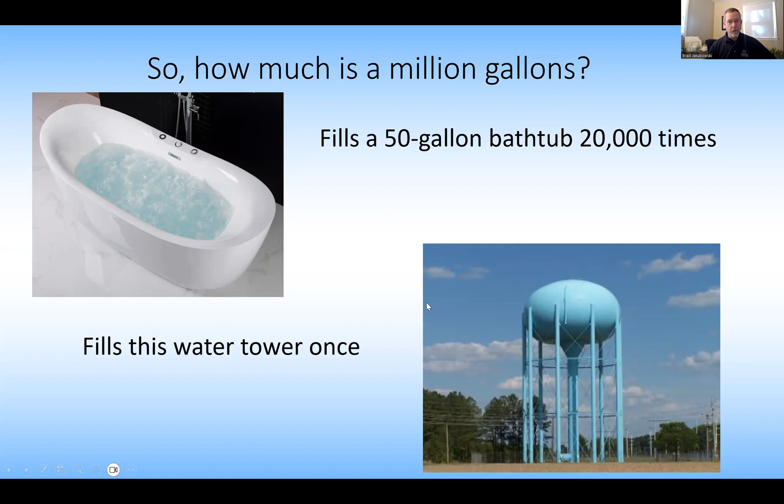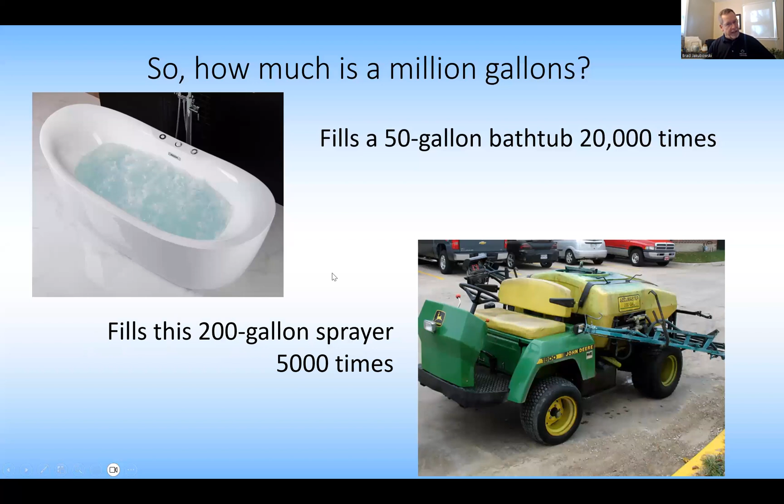So first question is, how much is a million gallons? Well, with 1 million gallons, we could fill a 50-gallon bathtub 20,000 times, or fill this water tower once, since they normally carry about 1 million gallons. If we're working in the city, many of us athletic field managers may be using municipal water, so this may be one of our primary water sources. We could also fill a 200-gallon sprayer 5,000 times with 1 million gallons. So if we had one of those water towers in our backyard over at the shop, we could have plenty of water to fill plenty of tanks over the course of a season, or even our lifetime. So that's how much a million gallons is.

Our challenge today is to figure out what we can do to conserve 1 million gallons or more throughout the course of one of our seasons. And this was kind of our challenge. I thought this was interesting, and it's been fun to work with this one. Is it even possible to save 1 million gallons?

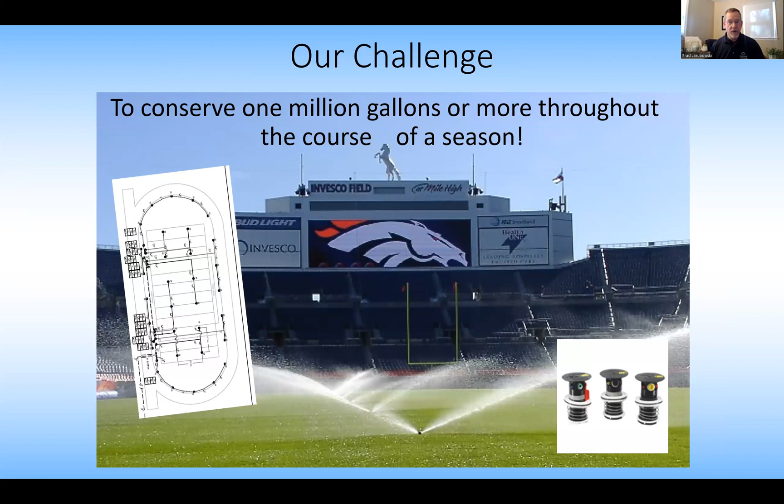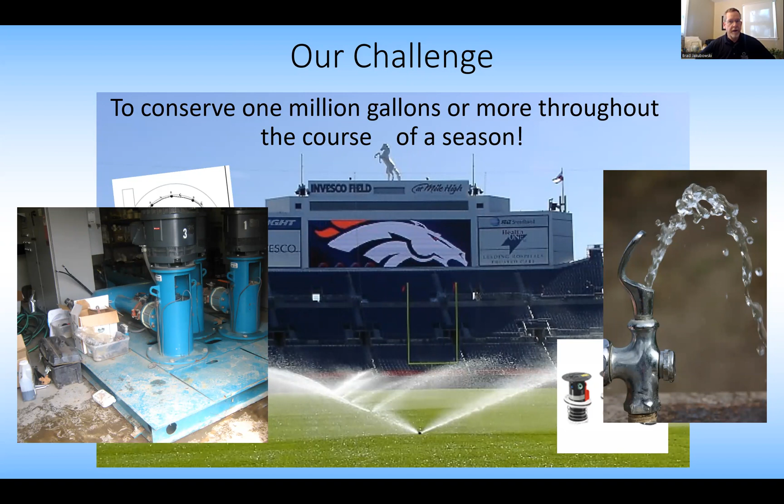Well, we can save it through sprinkler choices, the different kinds—maybe going from some less efficient sprinklers to more efficient ones might be one way to do that. Maybe it's some changes in design or improvements in the design of our systems. Capacity—maybe it's a pumping system versus a different kind of water source system we may be looking at. It could even be drinking fountains. If you have drinking fountains at your facility and you see them seeping or weeping and they don't seem to want to shut off, how much water is actually running through them over the course of a growing season or one of our game seasons? Or even what's going on in the bathrooms—do we have a leaky toilet or urinal that keeps wanting to run a little bit and doesn't want to shut off well? How do those impact us as far as overall water use? Those are some of the things we're going to take a look at today.

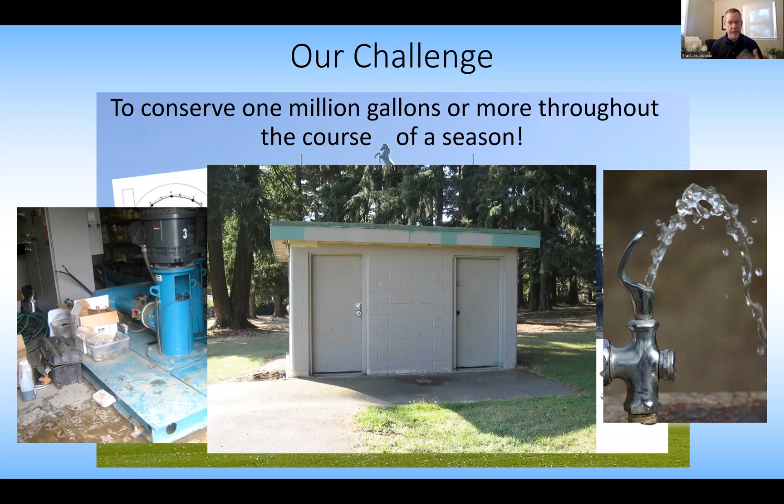So next question: why save 1 million gallons? Why would we want to do that? For you guys out there, does anybody have an idea of why we would want to save 1 million gallons? How does that benefit us as a turfgrass manager? Would anybody care to answer that one, or just give a suggestion of why?

Money, you bet. Money is a big one. So money is very important. Absolutely. Any others?

You think? And actually, money is number one on my list. So let's take the list that I've got here. Money, absolutely. Next one might be public relations, PR, maybe something else we can do with that.

I don't know, have any of you been approached by somebody where sometimes you drive by a bank and all of a sudden it's raining and you see the sprinklers running while they're driving by, or down a median and the sprinklers are still running. And so somebody may come up to you and ask, gosh, you're running those athletic fields, is it really necessary to use all those resources and water and things like that?

Oftentimes they'll approach me about that. Why are you in this particular business? So public relations can be another one. Stewardship, just being good stewards of the limited amount of water that we oftentimes may have. Or another one might even just be integrated pest management, or what I like to call integrated turf grass management. How do we manage our water to be able to better manage our playing field, the skinned area, diseases, weeds, all those kinds of different things. So there's a whole bunch of different reasons why we might want to save 1 million gallons.

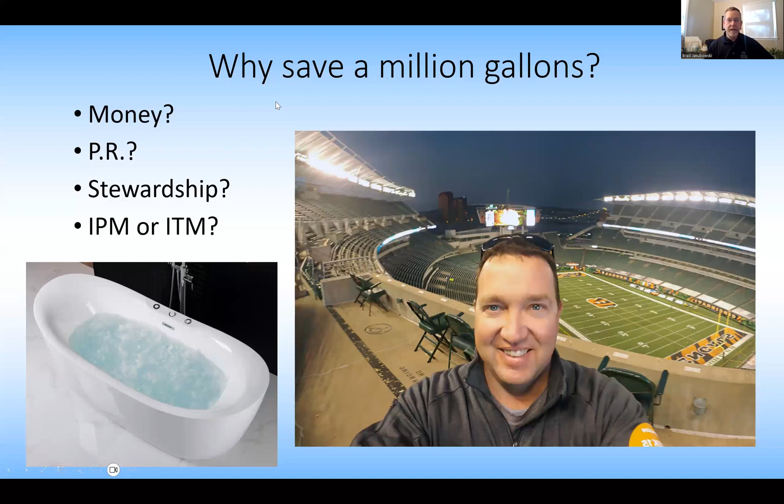I oftentimes give him a hard time because he went from a natural grass field to taking care of a synthetic field. And I said, it must be pretty easy to save 1 million gallons if you're doing it that way. But now that he's at the Bengals, he still has his practice facilities that he needs to do, and he's still kind of in that same frame of mind: what can I do to save 1 million gallons through a season?

Okay, so let's move on. Again, why save 1 million gallons? Well, one of the things we talked about was money. And the average cost these days, I don't know if you guys are running off of well or municipal water or whatever it might be.

Right now, average cost for municipal water is anywhere between $4 and $8 per 1,000 gallons. And this container over here on the right, this is a 1,000 gallon tank. So for each one of these 1,000 gallon tanks, it's going to cost us, let's say on average, about $6. Which if you think about it, that's actually a pretty decent deal, because if we go somewhere else, it might cost us $20 for a case of these, or $7 to $10 for a 5-gallon tank. So comparatively speaking, sometimes it can be better, but this is kind of what we're looking at.

So in this case here, let's go with $6 per 1,000 gallons. And we need to figure out, okay, how many 1,000 gallon units are there in 1 million? Well, there are 1,000 1,000-gallon units in 1 million gallons. And so if we were to take $6 times 1,000 of those units, we could actually save $6,000 in a growing season just by finding a way to save 1 million gallons.

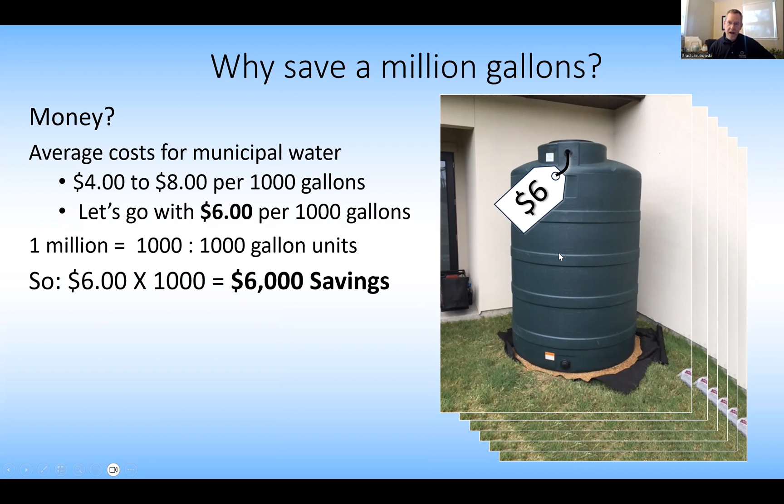And so those are some of the things that we would kind of try to look for. What are some of the little things that we can do? Can we save 10,000 here, 20,000 there, another here? All of a sudden, those gallons start to add up really, really quickly, which is kind of nice. Okay, and so again, all of a sudden, that $6 turns into multiple $6 as the season goes on.

All right, so again, why save 1 million gallons? We've got public relations. Is that one of the things that we might be looking at? Can we actually have something posted in the news or online or something like that?

We saved 1 million gallons. And all of a sudden, some of the people that might be a little bit concerned about water use and the things we're doing for athletic fields, golf courses, and parks - why are they wasting that water? Well, if we can save 1 million gallons, all of a sudden that might make a difference.

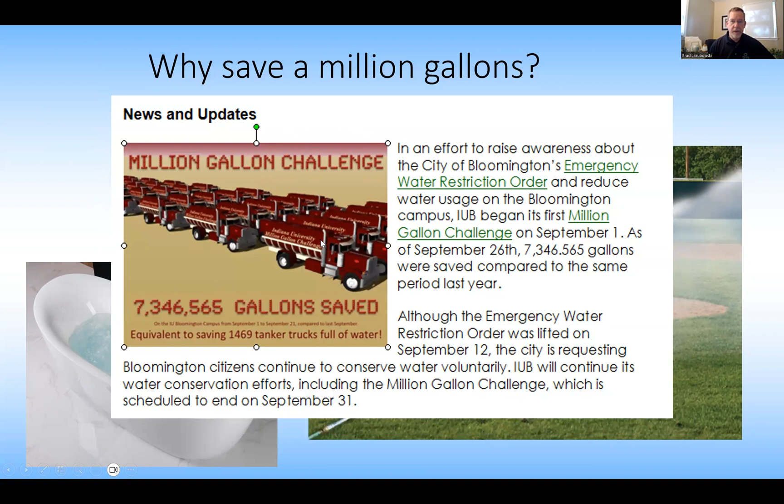It's kind of like some of those manufacturing plants that, when they do it, they'll say so many days without an accident or something like that. So it's also something you can kind of celebrate. It's like, what, we're up to 1.5 million or 2 million gallons. And people out there, they're going to say wow, that's pretty significant.

So again, stewardship - if we're limited on water and our resources, just being able to save 1 million gallons just might be helpful that way.

Or again, trying to limit diseases and/or weeds. Are we struggling with having too much poa triv in our outfield? Well, being able to cut back on irrigation a little bit, maybe that might stress it just a little bit so that we can replace it with perennial rye, Kentucky blue, tall fescue, or whatever we might be using. Or if we're down south, some kind of Bermuda grass or something like that. So there's some different things that we can do with saving 1 million gallons.

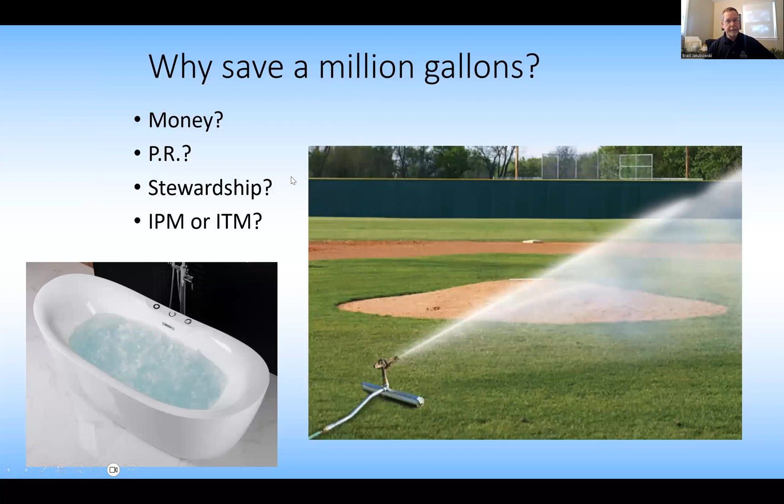Okay, or out there at Petco Park in San Diego, this is one of the things they would also let people know as far as PR goes: to conserve water, the playing field is watered on a timing system with moisture monitors that will adjust watering as needed. That's a great way to let them know that we're not just dumping a whole bunch of water and fertilizer and all kinds of things to get these things to look so good. It really helps show them that we're pretty darn good at what we do, and this is one way to show them that on limited resources - which we all have - we can actually make a pretty darn good looking field with minimal resources and materials.

So again, why save 1 million gallons? Water efficiency is important - this is good to remember. It's important no matter the reason we do it, or the source, or the method of use of how we do it. All of these things become very, very important. It's, in a sense, very critical that if we can do this, it makes a difference.

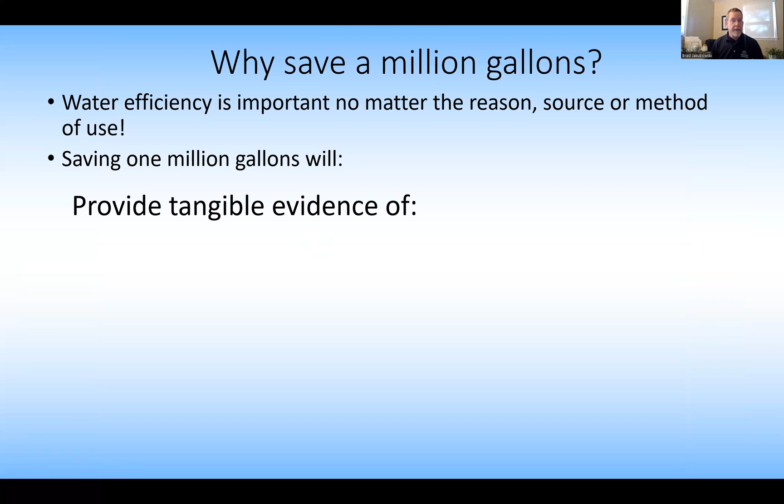So they provide, by saving 1 million gallons, tangible evidence of documenting that your facility is a wise water user. So all of a sudden, record keeping, monitoring your meter or whatever it is, how much daily flow you're using, can be very, very critical in this case. So then just documenting that your facility is a wise water user helps you defend yourself whenever those questions might come up.

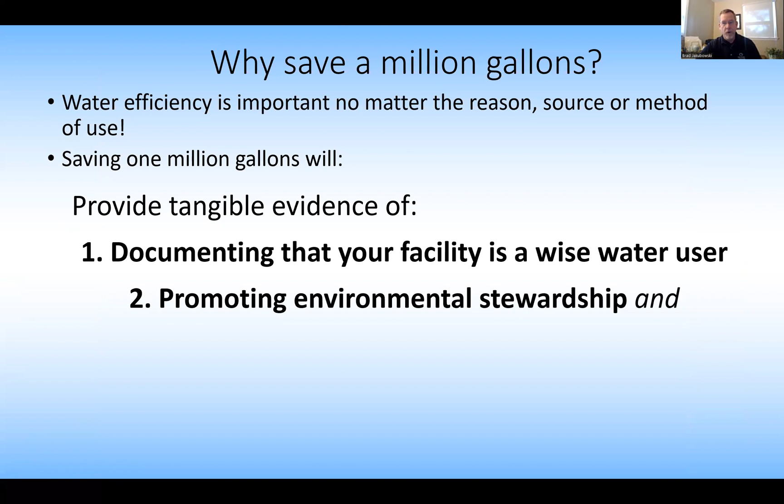Another one then is just promoting environmental stewardship. And there may actually be different grants or different prizes or things that you can apply for that may help with this in this kind of situation.

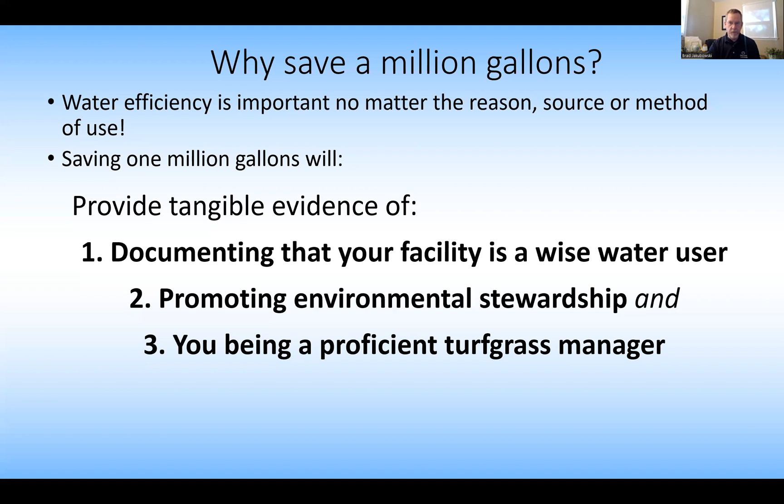Another one then, finally - this one here I like the best - is it also provides tangible evidence of you being a proficient turf grass manager. And in this industry, we have to be. For us to keep our job, or just to keep the business running, we have to be as proficient as possible. And if we can do this, just by recognizing the little things, it can make a huge difference.

Okay, so how do we save 1 million gallons?

Well, one of the things that would be very important is first identifying overall water usage of an entire facility over the course of a year, which might come from final overall water bills, yearly water bills, and just good record keeping.

From there, implementing various outdoor and indoor water saving practices. It's not just what we put down on the field or on the skins, it's a matter of indoor and outdoor. If we can record anything we see dealing with water, we can do it. Does it really matter how you save it? Not really. Record keeping becomes key when we're doing this.

I was speaking with John Scott, vice president of agronomic services with Nicholas, and this is some of what he tries to keep in mind when doing designs: water saving starts in the mind, and you have to be committed to it. Once you start doing it, it becomes pretty straightforward.

So let's start saving 1 million gallons. How can we do this? One of the biggest things is just improving our irrigation scheduling.

This is something you can ask yourselves. We put out some notes and found out from other people how they schedule their irrigation. What we found is that 97% of them use some kind of observation of the turf, like asking are we starting to wilt, do we have footprints going across there, do we see some stress areas. So most of us use observations of the turf.

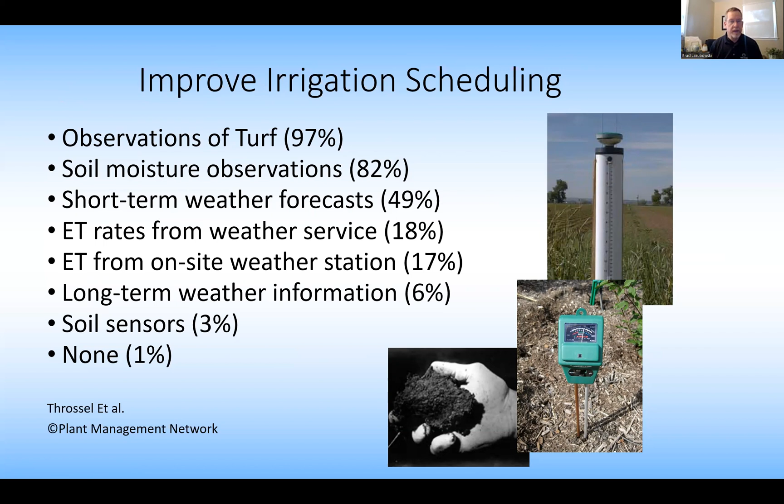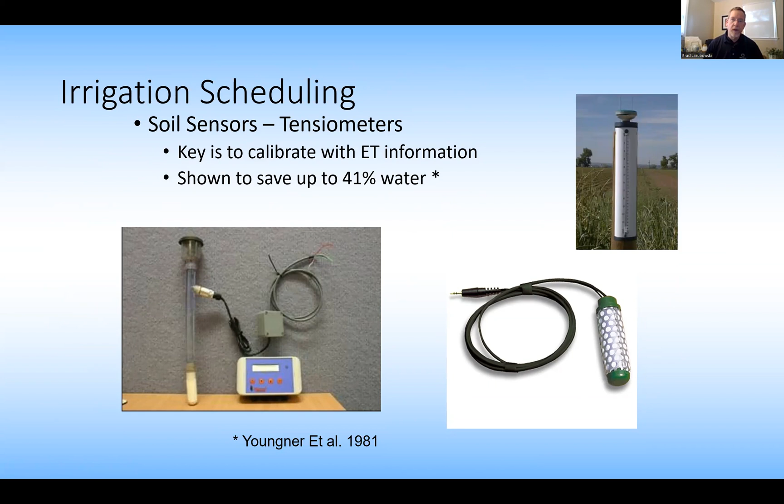Soil sensors, some of you might use soil or moisture sensors, maybe in-ground ones like this, or atmometers. These atmometers give you good ET information by simulating what evaporates off the soil in addition to what evaporates into the atmosphere, helping you find out what's going on with soil and air dynamics.

Have any of you used a TDR or these probes to monitor soil moisture in the soils throughout the week? Golf course superintendents often use these on their greens, and when the greens get down to, say, 13% water moisture per volume, that's when they need to start irrigating. We can do the same on our baseball fields: find out when the stress time is, when we really start to see footprints out in right field or left field, when things really start to wilt.

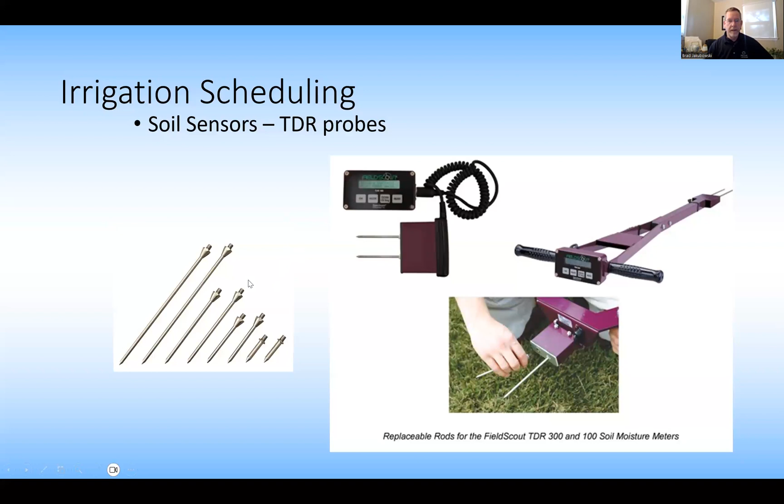You can take moisture sensors out there and take samplings and find that these things start to stress at 18% or 12% or whatever it is. That can be a nice cue to push our grasses a little bit and save water by using one of these TDR probes. Soil sensors are becoming much more readily available, and there's a whole bunch of different kinds, as you can see here, some you can punch into the ground or bury, or old-fashioned ones like this.

I pulled this one off the internet recently. Installing a WaterSense labeled soil moisture sensor could save an average home with an automatic irrigation system more than 15,000 gallons of water every year.

So I got to thinking about this. It's like, okay, 15,000 gallons - what would it take to actually save that much? Let's say if we had 80 irrigation days throughout the summer, that would equate to about 180 gallons of water per day. Not bad, that's pretty easy to get. Or that would be about a 70 or 80-second reduction in runtime for a 10-station irrigation system.

So if you had 10 stations all running, and all you did was cut back, let's say 2 minutes, or actually less than 2 minutes per run for each of those stations throughout the season, you could very easily save 15,000 gallons, which I thought was kind of interesting.

So oftentimes it may not take much, it might just be a matter of taking a small change and seeing what happens, or even pushing your turf a bit. You know, I usually have my sprinklers at night, running at about 15 to 18 minutes. Well, what happens if I cut back 10%, or a couple of minutes? What difference will that make in our fields? Are there some differences in certain zones? Can we run some of these zones at different times as well? It can make a difference.

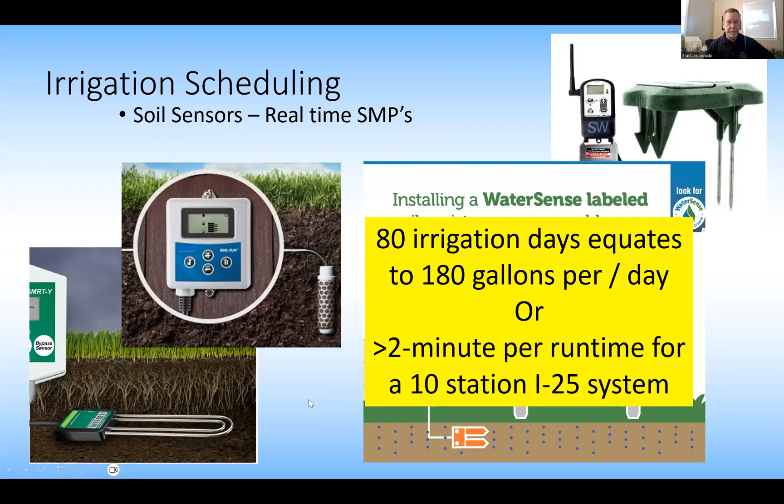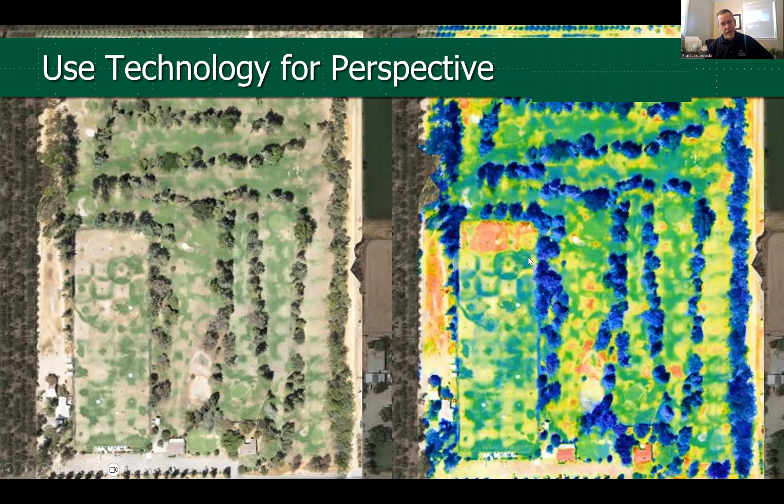Technology - have any of you had a chance to use drone technology monitoring soil moisture, temperature, or leaf color? Oftentimes we can get stressy situations like this where you can see the infrared signatures, where you can see where these sprinklers just weren't doing very well. Or on a baseball field, you may just take a photo and find out something like this.

So from your experiences, if you saw something like this with a bunch of crop circles out there, what does this tell us about our irrigation system? Has any of you ever experienced this - how does this impact us?

With this one, when you start seeing donuts like this, or a bunch of crop circles, this is normally an indicator that you have low water pressure. So then it's a matter of finding out - do I have leaks? Are 2 stations running at the same time? Is one not shutting off? All of those kinds of things. There's a number of different things you can start to monitor. They've definitely got some serious crop circles going on here, maybe some heads that aren't working at all, while these other areas are just a little bit more on lower pressure or something like that.

So this would be something else to utilize - simple drone technology, or just standard photographs. Another one here would be monitoring short-term weather information.

So I've got a question for you. We've got these two here: on Monday, June 11th, today's high is going to be 96 degrees with 15-mile-an-hour winds out of the south. Or on Friday, June 15th, today's high is going to be 93 with 6-mile-an-hour winds out of the southwest. So then, off the top, I would normally ask attendees - which day would have a greater need for irrigation? And just by this limited information, you'd probably think, well, Monday definitely going to have a greater need for irrigation.

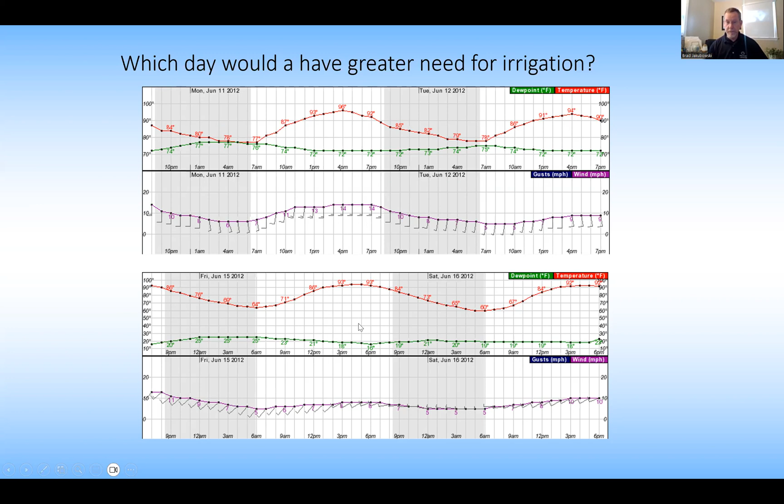So this one doesn't really need irrigation. This one probably definitely would, or definitely needs some serious monitoring if we have a day like this. Okay, all right, another one.

I don't know if any of you have actually conducted an irrigation audit or gone through one of these. Oftentimes, most people think, when we're looking at this, of putting out the catch cans and seeing how well the water is being distributed. That is one way, one part of an irrigation audit. That's one of the things we would normally do, just to see how well our irrigation sprinklers are doing.

And so with this, an irrigation audit does measure distribution uniformity, but it also does a lot more. The question then is, when you're running an audit like this, how long do you have to run your system to adequately irrigate the driest 25%?

That's what you're always trying to do: finding the driest areas in your fields and keeping those alive. By doing that, that means a lot of the other parts of your fields may actually get too much water. So this is where you try to make sure that your sprinkler systems and irrigation systems are running at peak performance or peak efficiency.

It's important to make sure there's not a big difference between the dry areas and the wet areas. That's kind of what this comes down to: you want to try not to have really, really dry areas and really wet areas. You want to try to bring those into the middle.

So from there, excellent is 80%. If you have an 80% efficient system, that's an amazing system, very, very good. We start getting down to 55%, that's the one that really, really struggles. Normally athletic fields average between 60 and 70%, so we're kind of in between, around the good area here.

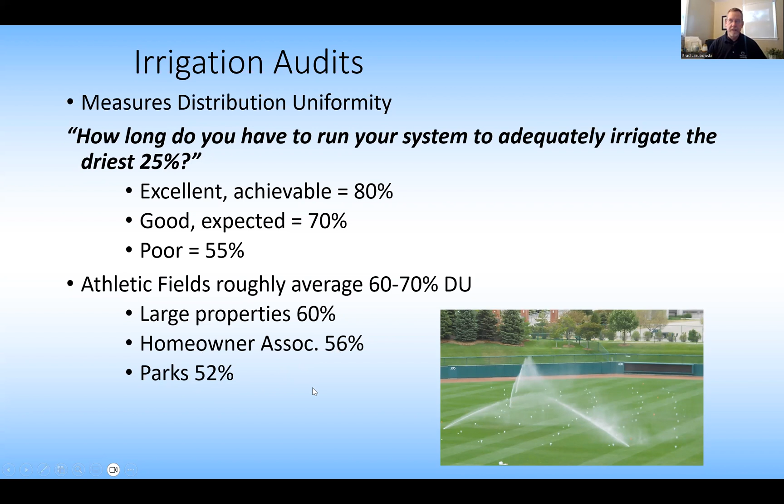Large properties might be at 60%, possibly. Homeowners associations, maybe around in the 50s. And parks also kind of around the 50s as well, just because of the nature of how they're installed and the kind of systems that they have.

So just as an idea of how one of these things run, if you wanted to find out what your distribution uniformity is, it's just a matter of taking the low quarter divided by the overall average of everything else, and finding out, well, our overall average for this particular system is 50%. It runs at about 50% efficiency.

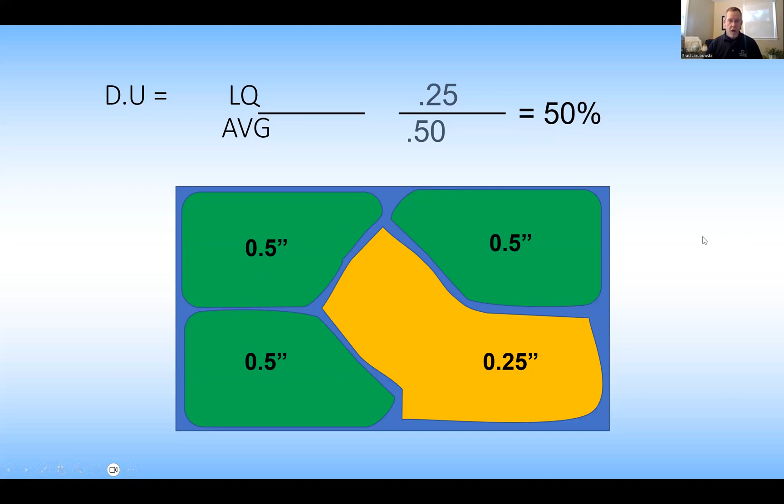So from here you would then say, okay, what does that mean for me? Let's say these places are receiving a half an inch, where this one's only receiving a quarter of an inch, which makes a huge difference. So what does that 50% mean to us? We ran our numbers and wanted to find out what's happening once we did all our catch cans.

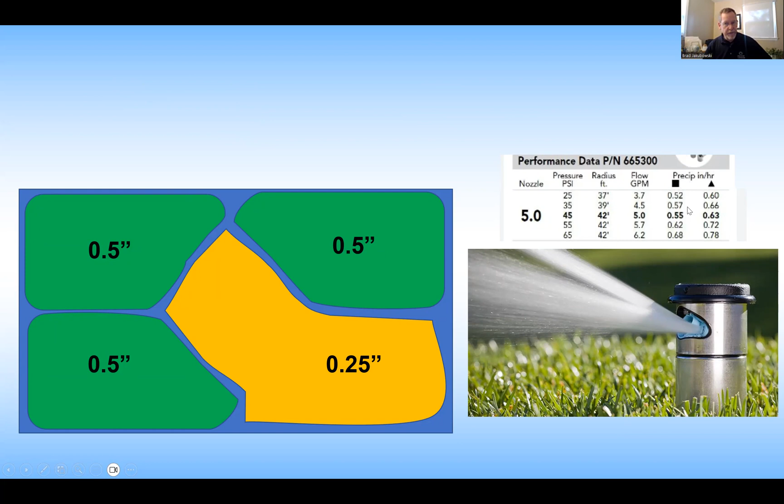Let's say with this, we're using I-25s, or these particular sprinklers, and with these nozzles, they're putting out about 5 gallons a minute. And we're going to say they put out about a half an inch of water per hour. Instead of 0.55, we're going to simplify it and just say they put out a half an inch of water per hour.

If the grass required a half inch of water and the system was running perfectly, with a precip rate of a half inch per hour at 100% efficiency, we would only need to run the sprinklers for 1 hour. That's what this is showing us: if we ran these sprinklers for an hour, we'd get about a half inch of water from them.

However, if our system only has a 50% distribution uniformity, that means we'd have to run our sprinklers for 2 hours. Here's how you figure that out: a perfect system would need an hour, but because we're only 50% efficient, you take 1 hour divided by 50%, and it comes out to 2 hours.

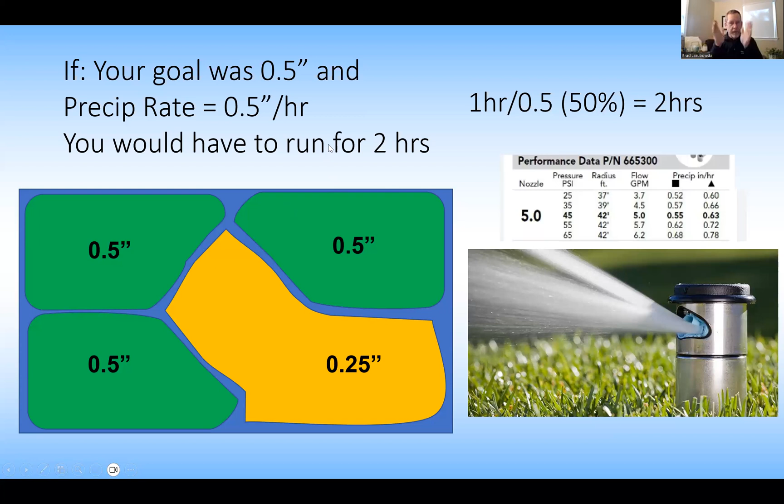So to make sure this part gets enough water to survive, we end up overwatering other areas twice, where one spot finally gets what it needs at a minimum. That's why it's important to have the highs and lows as close together as possible.

So what does that mean for us? If we're running these sprinklers at 5 gallons a minute and have to run them for 2 hours or 120 minutes, that's 600 gallons times 40 sprinklers, which means we're looking at 24,000 gallons per irrigation event. Every time you run those sprinklers on a particular field, it takes 24,000 gallons.

We could start doing the math that way too. So keep in mind, we're looking at 24,000 gallons to keep all of this grass alive. This area is going to be a little more wet, and this one is going to be just sufficient.

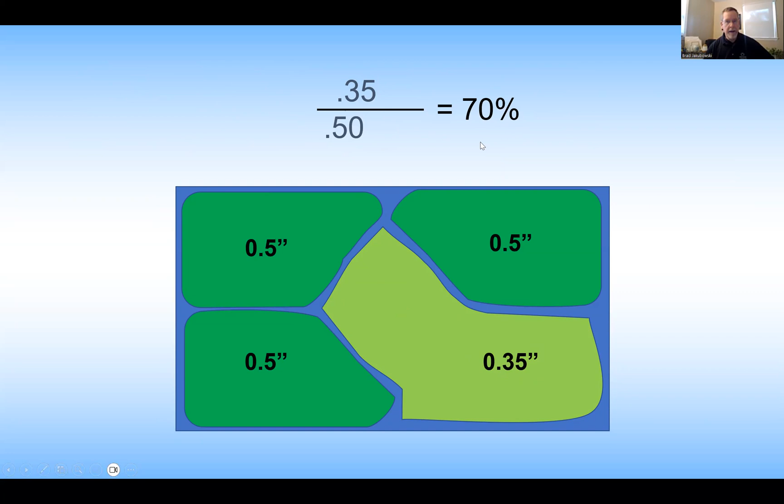Let's say we were able to improve the efficiency of this area. Instead of a quarter inch, we bump it up to 0.35 inches, or a third of an inch. That increases our overall efficiency from 50% to 70%. So what does that mean for us? Let's run the numbers.

If our goal was a half inch and our precip was 0.5 inches, we'd take that 1 hour divided by 0.7, and instead of having to run those sprinklers for 2 hours, we'd only have to run them for 1 hour and 25 minutes.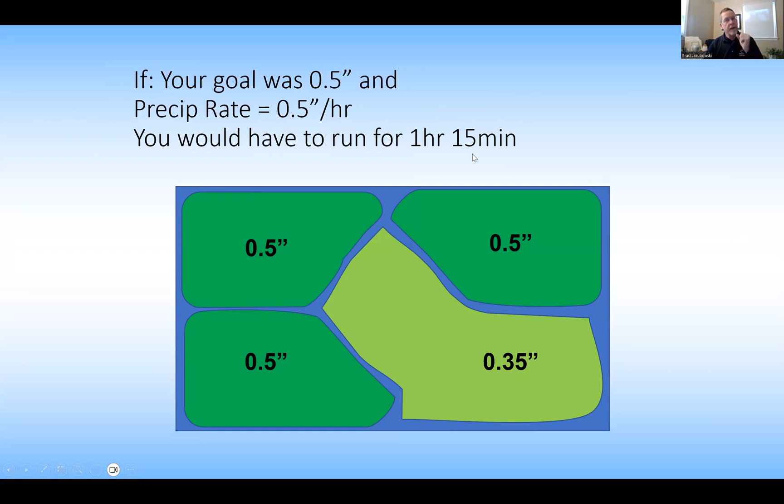It becomes that much more efficient just by fixing the sprinklers and finding out what our problem was. So instead of a 2 hour runtime, now we're only at an hour and a quarter, which makes a huge difference.

By running it for just those 75 minutes or so, instead of running 24,000 gallons per irrigation event, we're now only running 17,000 gallons per irrigation event, which means we have a savings of 7,000 gallons every time we run our sprinklers for this particular area.

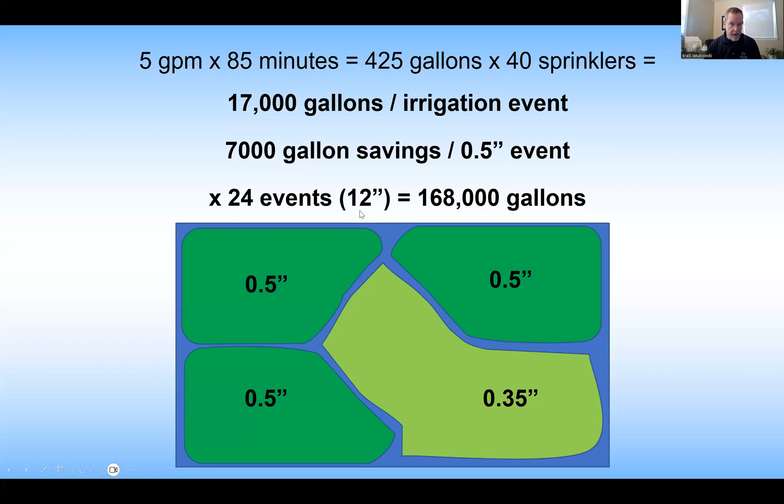If we had 24 irrigation events, or put down 12 inches for the year, we would save 168,000 gallons. That's a lot of math, but there are things that, just by changing how efficient your sprinklers are, can make a huge water savings in a relatively easy situation. I just want to show you that by changing our irrigation efficiency from 50% to 70%, we can have a pretty good water savings event.

So it's about 14,000 gallons per inch that we're saving. If we needed more than 12 inches throughout the growing season, say 18 inches, we could say we need another 6 inches, which would be 6 times 14,000 gallons.

That's how much we would save throughout the season, kind of thing like that.

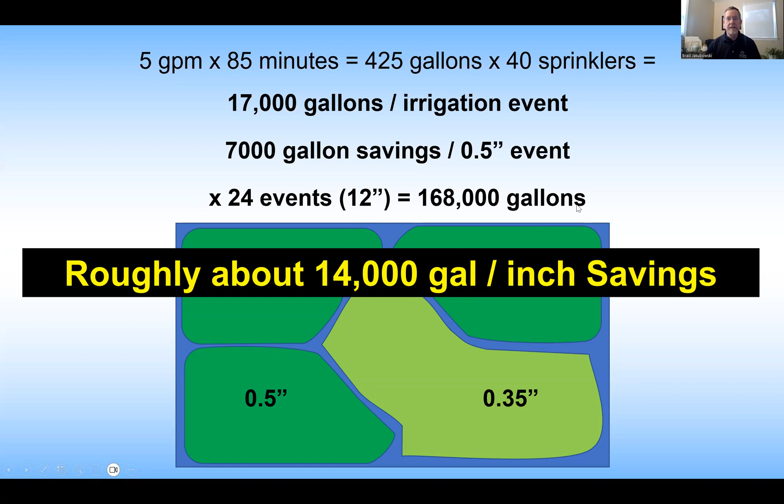Okay, so you can use different kinds of things when you're doing an irrigation audit. You can use official catch cans like these that have got little gradations in them so you can read the volumes, or you can use tuna cans. This is a tuna can right here.

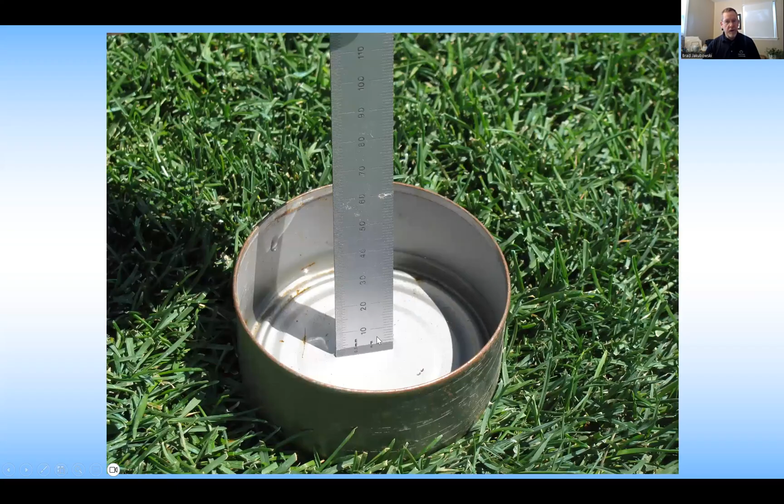The nice thing about using tuna cans is they have these perpendicular lines where all of the edges are straight up and down. When you have a can that looks like this, you can put a ruler directly in there and measure how much water. I ran the sprinklers for 20 minutes - how much water did I get? You can stick a ruler in there and find out, when I run the sprinklers for 20 minutes, I get 1/8 of an inch or whatever it is.

So whenever you're using cans that are perpendicular, they don't have slanted edges like this one. You can take a direct measurement with a ruler, and it makes it really easy to get an estimate of how much water is going down at a given period of time.

Okay, so again, other things irrigation audits will help with is finding out what's happening with my water supply. Maybe you're able to do some investigations and find out, you know what, we've got some steel pipe out there and it's starting to corrode, and instead of being a 6-inch pipe, right now it's down to a 2 or 3-inch pipe. It can make a huge difference.

So you're going to check that. You'll check your pumping system or your piping systems and fittings - how's everything doing, are the valves working okay? Okay, sprinklers, the control system.

Do the sprinklers out in the field really match up with the kind of sprinklers that are supposed to be on, based on how the controller is set? With the particular sprinklers you have out there right now, let's say it's been set for the last 2 years, running at 20 minutes a station. In that 2 years, let's say you went from brand A sprinklers to brand B sprinklers, and all of a sudden that means you have a totally different application rate, and you might need to reevaluate how long you run those sprinklers - maybe cut it from 20 minutes to 15 minutes or something like that.

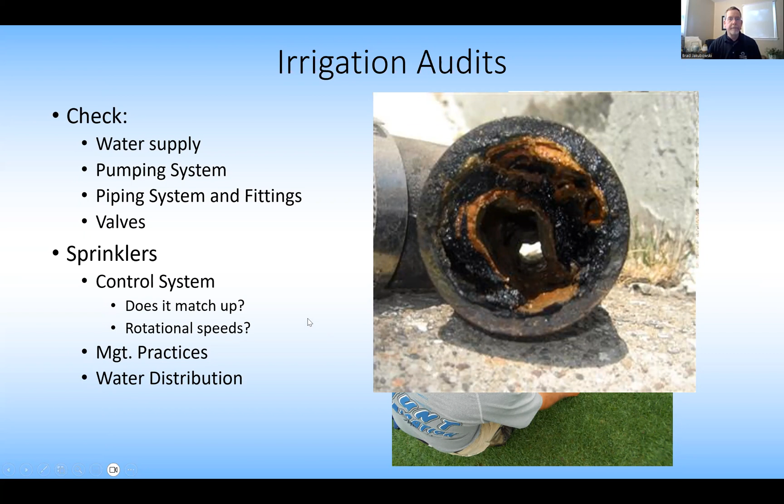You can also evaluate your management practices and water distribution just by sticking a screwdriver out in the field after an irrigation event and seeing the differences in how it feels and how that screwdriver goes in there. It can be something else as well, so you can do that.

Also, with a pitot tube - this is what we call a pitot tube - you've got this little tube, you put it right into the stream of where the spray is coming out, and it'll give you a dynamic pressure rating, just a readout of what your active pressure is. These can be very helpful to find out if my sprinklers are really applying water at the given speed they were supposed to be.

Okay, so that's one of the things you can do, running these on different heads. It was actually very helpful when we were running an audit on a particular system. This is what a pitot tube looks like.

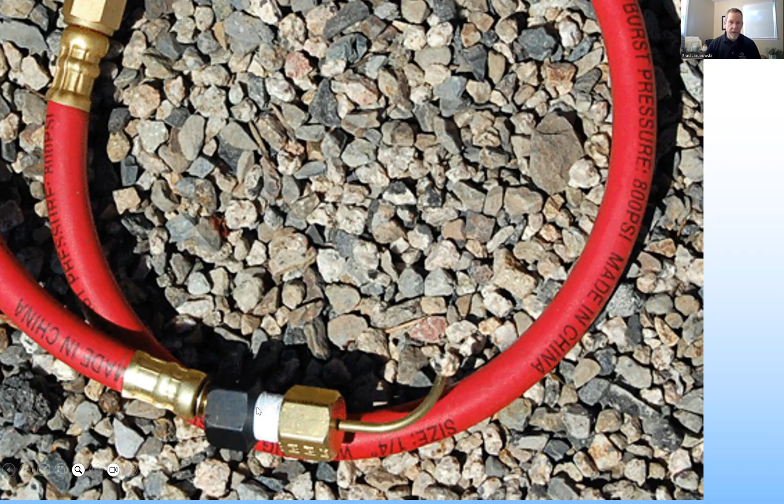So you've got your pressure gauge here, and then you put this little piece right there. It goes directly in the stream of the water, and then you can find out what's happening with dynamic pressure of each sprinkler. Also, if you've got something dug up, you can put a pressure gauge on the riser or off of the swing joint, and test your sprinklers that way too.

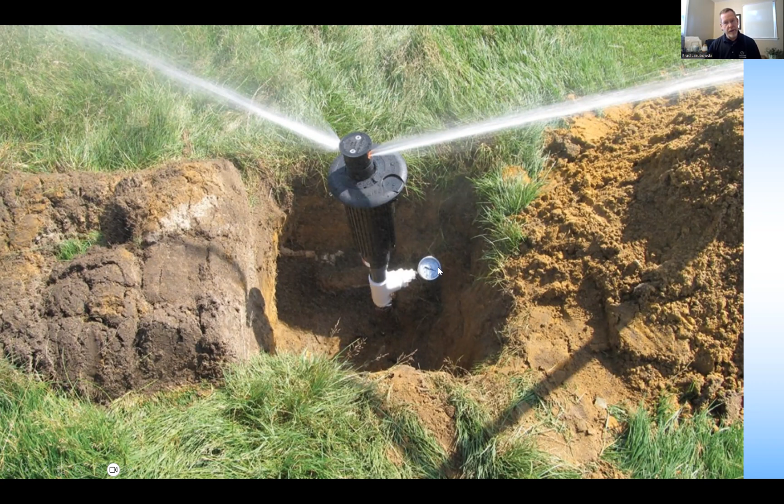So what happened one time is I was out there doing an irrigation audit in this particular field, on the same zone, actually the same lateral. One of the heads tested out at 70 psi. This one tested out at 46 psi.

So I went to the turf manager and said, why is there such a difference here? Have you been doing anything with these? He said, well, actually I did. This sprinkler over here just didn't look right, so I put a bigger nozzle in it, and it made it look better than this one. What it did is it completely changed the dynamics of how this thing was applying water out there. So all of a sudden this one was rated at 70 psi, this one was down to 46 psi, and he was really struggling, having to water these areas a lot more than over on this other side.

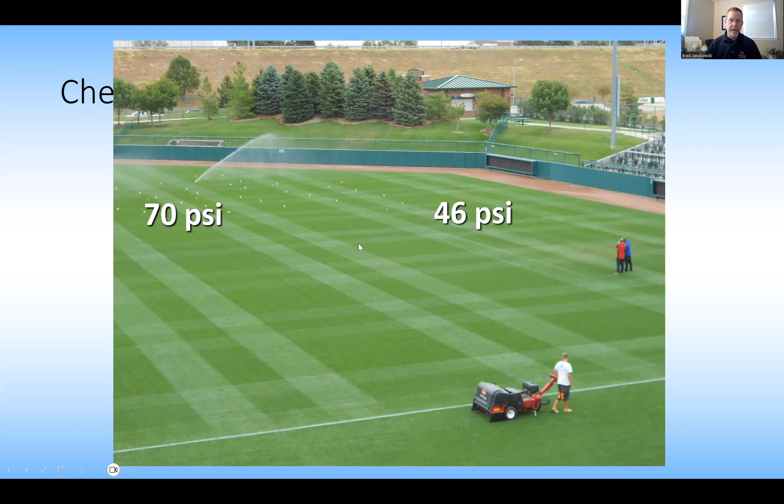So we had to do some investigating to find out what we could do to make that a little bit better. This can be very helpful to find out where your inefficiencies are. Do you have problems with piping or nozzles or clogged sprinklers or whatever it might be? Using a pitot tube and doing dynamic pressure checks is one way to find that out.

So this is kind of what we looked at when we actually tested those. This was that 70 psi sprinkler, and in a given period of time it put out about 10 mils of water, where the 46 psi only put out about 4 mils of water. So there was a pretty significant difference in how much water this sprinkler was putting out compared to that one, and those things can really make a difference.

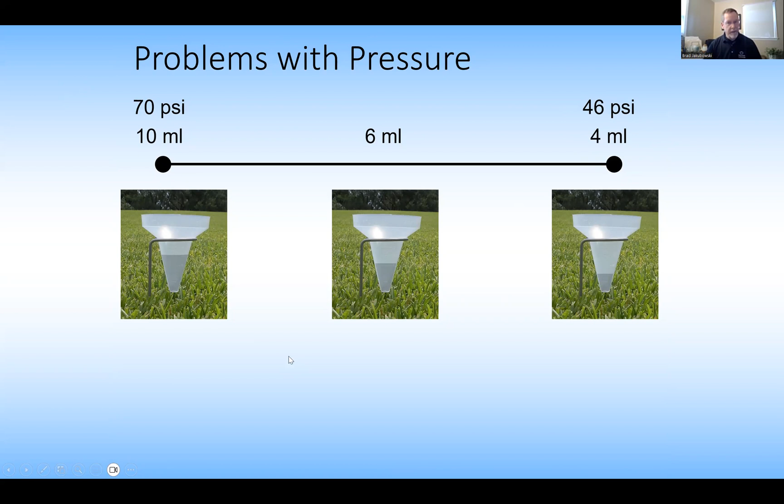So if this is our goal and we're putting this out, you can see that you'd definitely need to run this sprinkler longer to reach that 1-inch goal. This one, let's say you only have to run for 20 minutes. This one, you're probably going to have to run 40 minutes, close to an hour, just to get to that 1-inch goal. Huge difference.

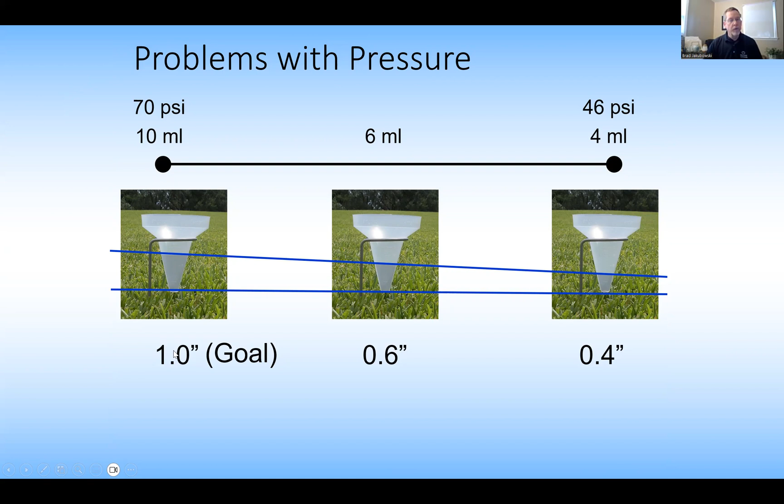Visual inspection can be another thing to keep an eye on. Do I have standing water? And when you're checking this out, does the water stink? Does that area stink? Has it been doing this for a long time, or is it fairly recent? Does it have a rotten egg smell, or does it not? That would be another thing to check.

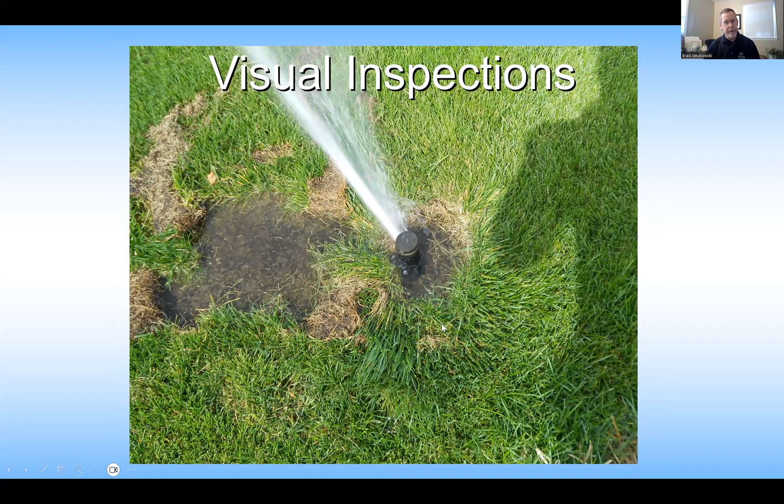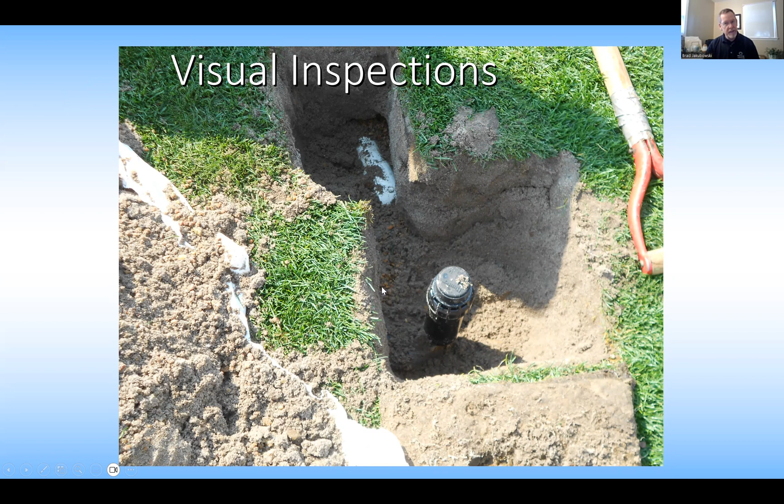If you're digging up and doing sprinkler repairs, monitor and take a look at what the soil's doing, what your roots are looking like. Anytime you do this digging, take a look at the roots and see how things are going. Do you have black layer? This is at one of the baseball fields we had. It had a pretty significant black layer, and it also smelled a little bit on the rotten egg side. So we had rotten egg smell going on and a black layer.

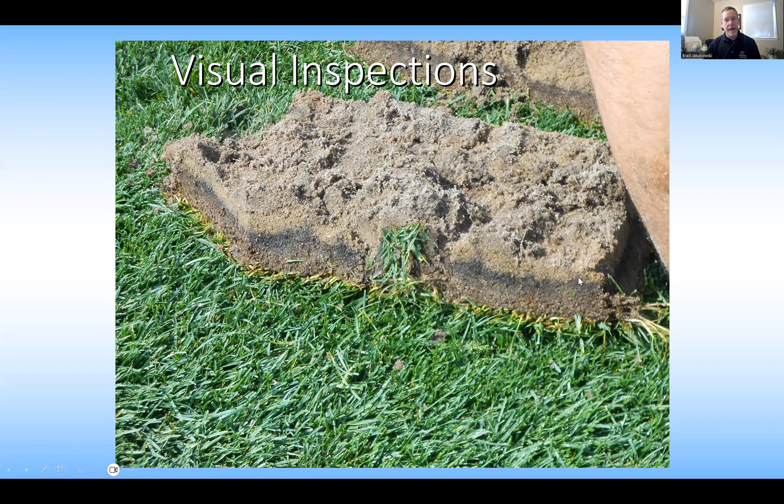In addition to just watering differently, chances are you're going to need to recommend a pretty serious aerification to break through this and help those roots become more efficient in receiving that water. So, recommendations from the industry: really learn to work with what you have, survey your facility for wet and dry spots, try to find different things.

This is one of the things I thought was really interesting: mark them on a glass-covered as-built in the crew room with a grease pencil. So we started doing this. It was really kind of interesting.

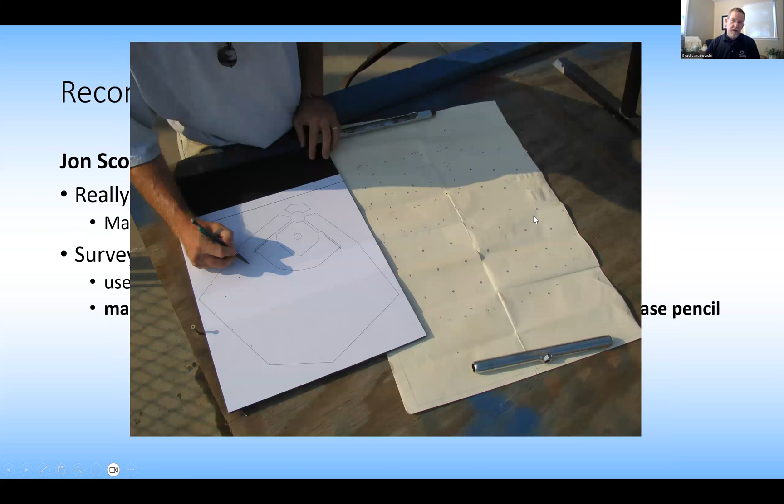What you can do then is use an as-built or your own map and build from that. As you're doing that, if you see donuts or crop circles, or something like that going on, well maybe there's something I can do, or at least mark it down so you don't forget about it, because it's more than just perception. When this is happening, it's perceived as losing water, but you also are actually losing water.

So this can be very, very important, because all of a sudden you've got water running everywhere. You can almost find out how much water you're losing each irrigation event.

Another thing we're going to take a look at here is what are some of the different types of irrigation system improvements I can make to save water, but not necessarily spend a lot of money. This was a survey that was put out.

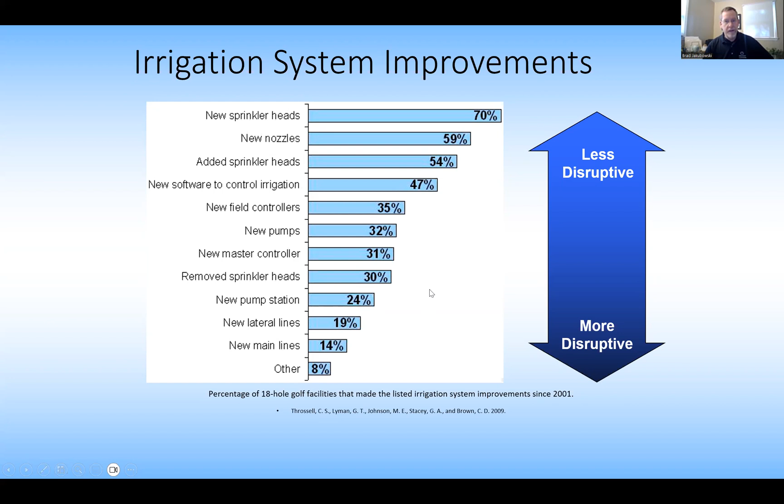Also, drain check valves might be something else you might want to take a look at. You'll have to find out, do your sprinklers have check valves in them? Oftentimes it's just a little rubber disc that's located here on your sprinkler heads.

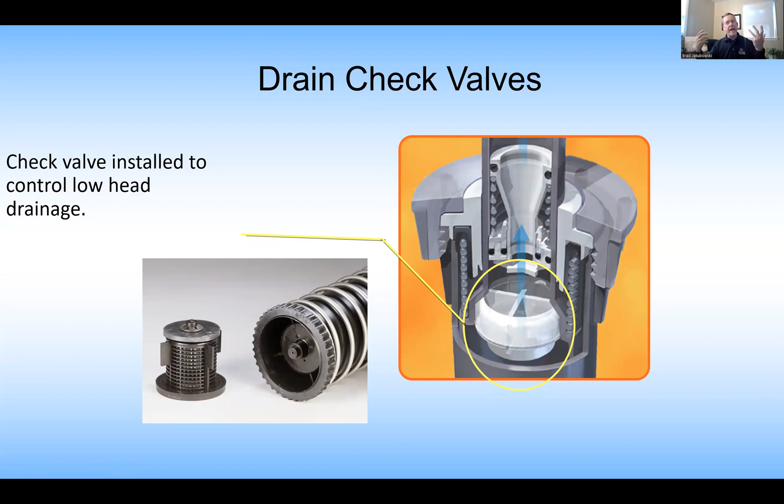What this does - these check valves - instead of the water running out of the top of the head, let's say if you've got a pretty good slope on your fields, some of that water is going to naturally just drain out of the heads. These check valves keep the water in the lines and don't let the water run back out, so you don't have to refill the pipes, so to speak.

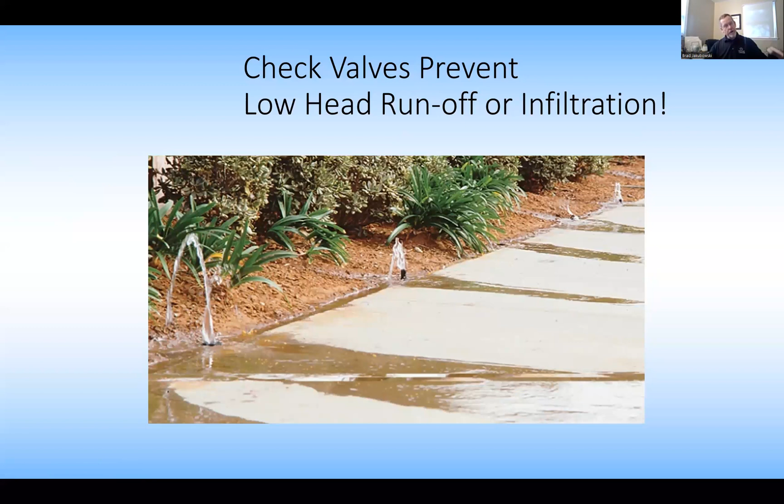So what difference does this make? If you've got some low areas, if you've got a pretty good crown on your fields, you may not see the water popping out and running like this, but without check valves, and you've got a crown on your field, that water's going to empty itself out of these pipes.

For this baseball field, let's say we have 2,000 feet of 1.5-inch pipe, and 50% of that water drains out when the system shuts off because there's no check valves, and it just naturally seeps out of those sprinkler heads. So we're looking at about 5 gallons per 100 feet of pipe, or 100 gallons drains out per every irrigation cycle.

If you have 128 irrigation days per year, that's about 12,000 to 13,000 gallons you could probably save just by adding these little rubber discs on the bottoms of your sprinklers - very, very simple. If you had 270 irrigation days, watering almost every day because you're in some of those warmer areas, you could double that, up to 27,000 gallons saved. You can see how much that would be - about $77 or $167 worth of that $6 water.

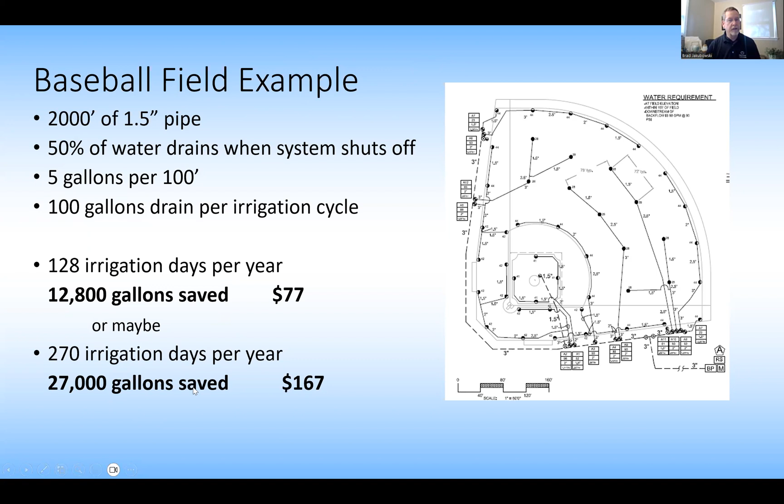Okay, so that'd be something else to kind of look at. I put this one in here. This is a golf course back in Nebraska that I'd worked with.

The reason I put this one in here is because he was irrigating his greens using a block system, very similarly to what we use out on our baseball fields and athletic fields. With this one, he had a 9-hole course, and he was putting new heads around all of the greens because they were giving him some problems. He was having trouble with irrigation, dry spots, water costs, and pumping costs.

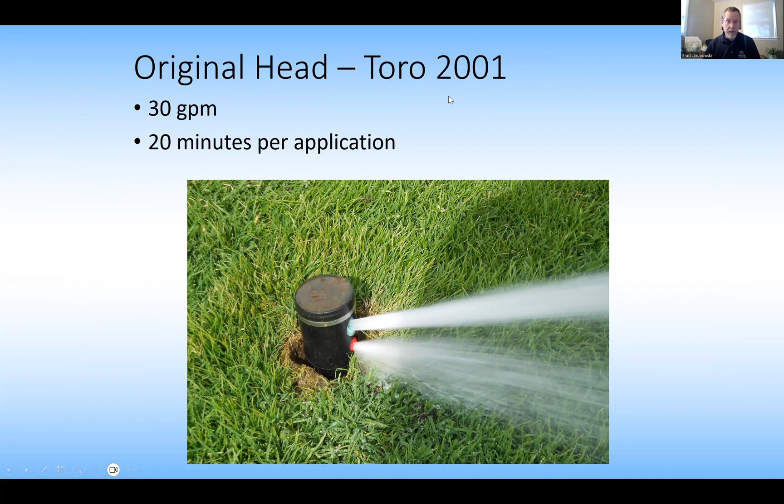He went from these old original Toro 2001s, which were pretty old heads, and swapped them out with these Toro DT34s, where you can kind of see they're very similar to a Hunter I-40 Ultra, with the opposable nozzles. By swapping out the sprinklers around the greens, he was able to reduce his run time from 20 minutes per application down to 14 minutes per application.

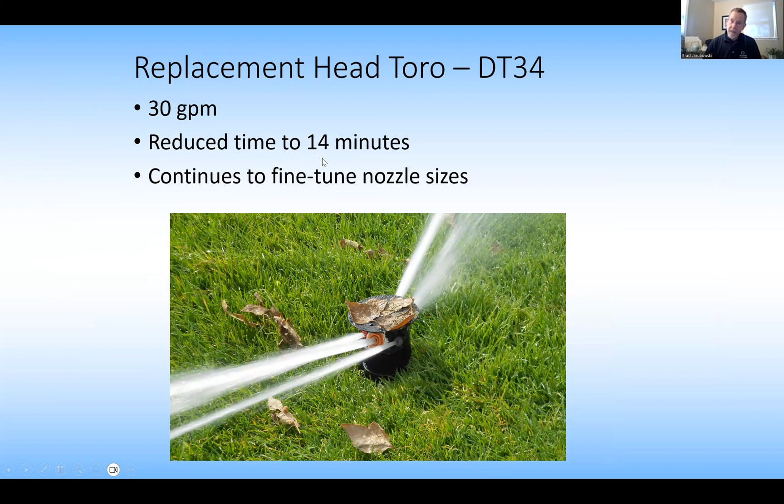Now he's continued to go in there and fine tune the different nozzles to help improve things further. In this situation, he was able to drop his run times significantly, improving his irrigation efficiency, and now he's much happier with these sprinklers.

He had some dry areas that he's been working on to get these things better. For him, in this particular situation, by just improving sprinklers, he was able to, for 10 greens, which is about 2 acres, similar to a football field, save about 3 million gallons in a growing season, which made a huge difference for him.

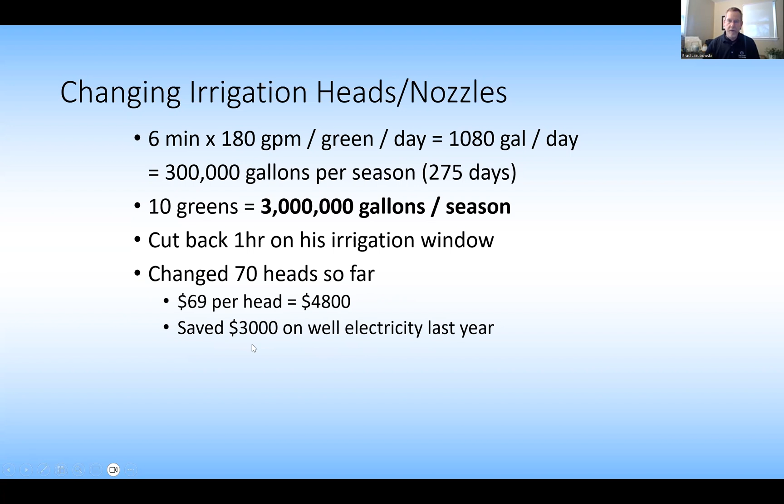Changing the heads cost him about $70 per head, running him about $4,800. But he was also able to save $3,000 on well electricity in that one year. So he almost recouped the cost of the sprinkler heads just by the amount of water he saved on running his well.

Another thing he does, something you might want to consider, is that he mows first in the day. Then after that, he does a quick syringe cycle with the sprinklers to seal off the grass and give it a chance to cool.

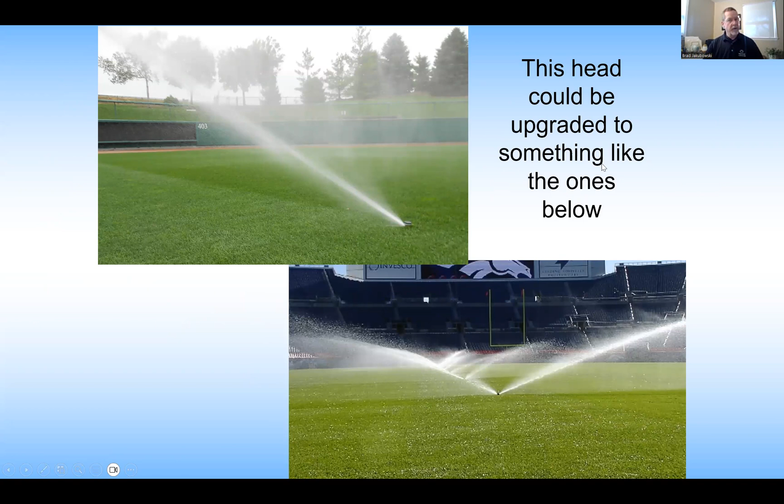Okay, pressure regulators. I don't know if in some of your sprinklers, especially in the landscape areas, you may want to consider whether you're using non-pressure regulated heads, like some of the less expensive ones from Depot or Lowe's, or actually ordering the better heads out there that are pressure regulated.

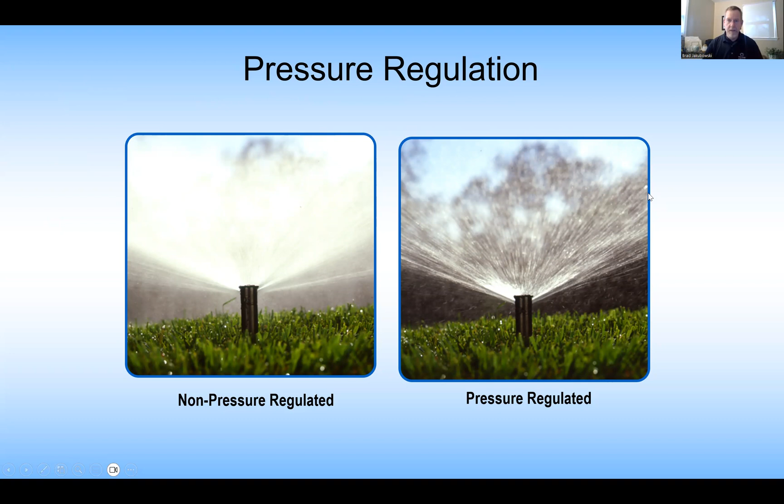Pressure regulated heads keep that pressure the same, let's say 40 PSI, so your droplet size is going to be very consistent. If our water source is at 70 or 80 PSI, non-pressure regulated heads are going to give you more fogging and less efficient irrigation applications. If you can have larger droplets instead, you're going to save water.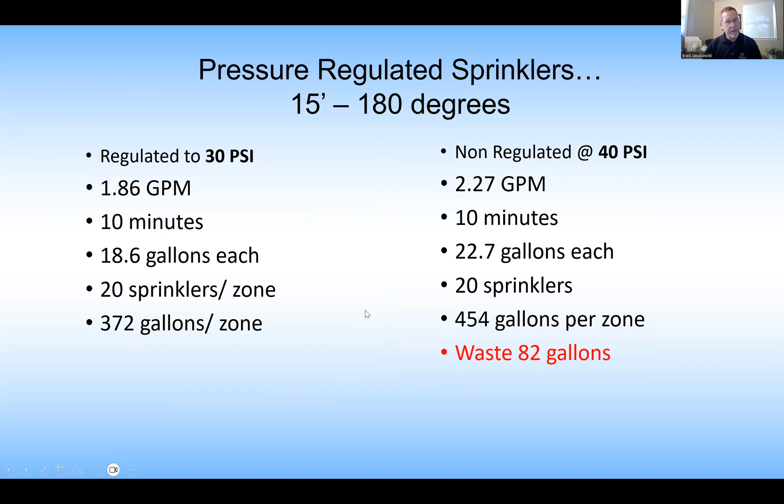This just runs through where you can actually make some improvements. If they're non-regulated versus regulated, you can see there's going to be some differences in the amount of water that you apply, especially for a lot of the smaller heads.

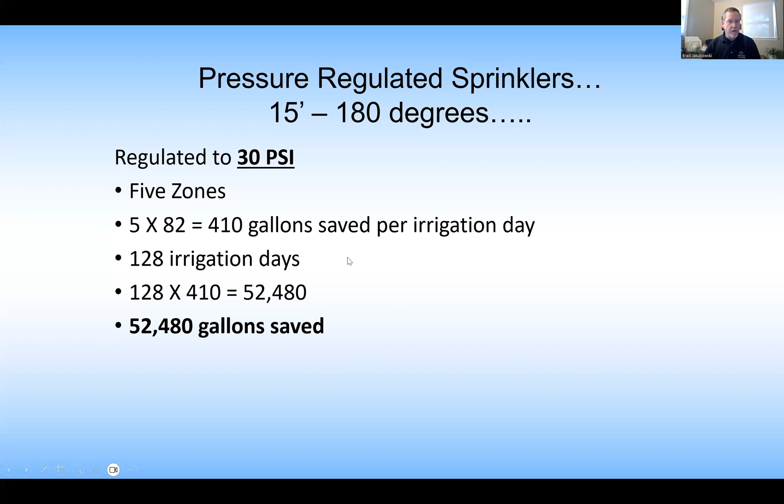So again, over time, if you've got 5 zones and you're watering a number of times a day or every day, whatever your irrigation schedule is, you can save, let's say, 50,000 gallons. You can put that on your spreadsheet saying I saved 100,000 here, 50,000 here, 20,000 here. Throughout the season, all of that water eventually adds up.

So, pressure regulated sprinklers and check valves. Let's say we're using check valves and pressure regulated heads. All of a sudden we're saving 50,000 gallons on regulated heads. The check valves save another 12,000 or more, with a total savings of 65,000 gallons and a $300 to $400 savings — that's just the $4 per thousand gallons versus $6 kind of thing. So there's a lot of different things you can do with this, and it's a matter of making little changes and keeping record of it.

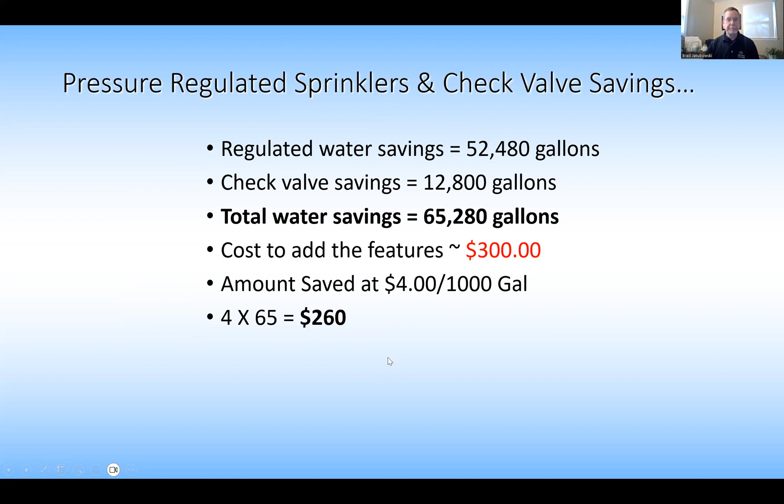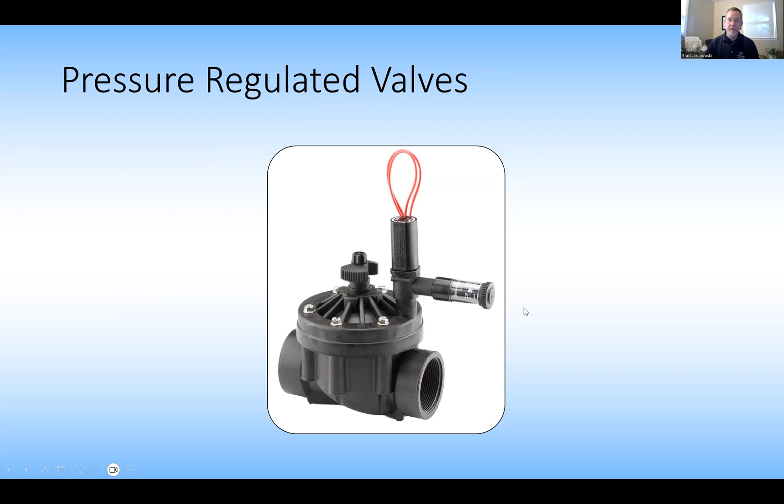That's kind of what this example is over here with your rotors. In this case, you might be able to save another 15,000 gallons by doing something like that, depending on how your system is put together.

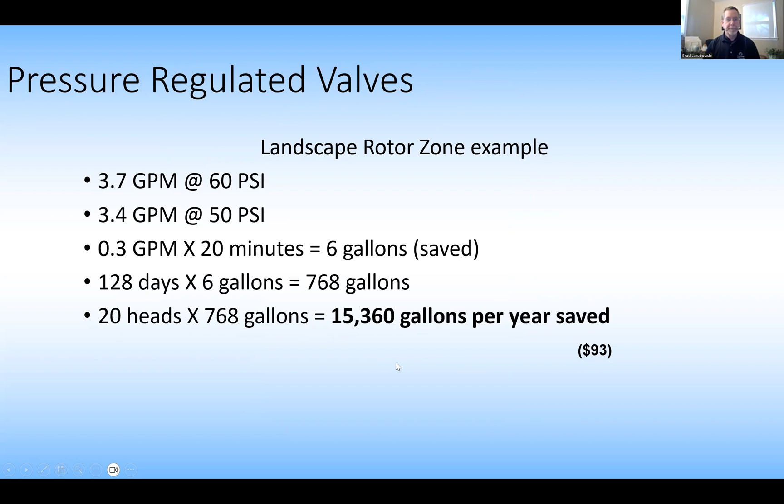That's about 6,800 gallons per month, which, with a 270-day growing season — the season when these things are open and running — comes out to about a 60,000 gallon water loss. So just by getting one of these repaired, or having whoever is in charge of facilities fix it, that's something you could take credit for in water savings.

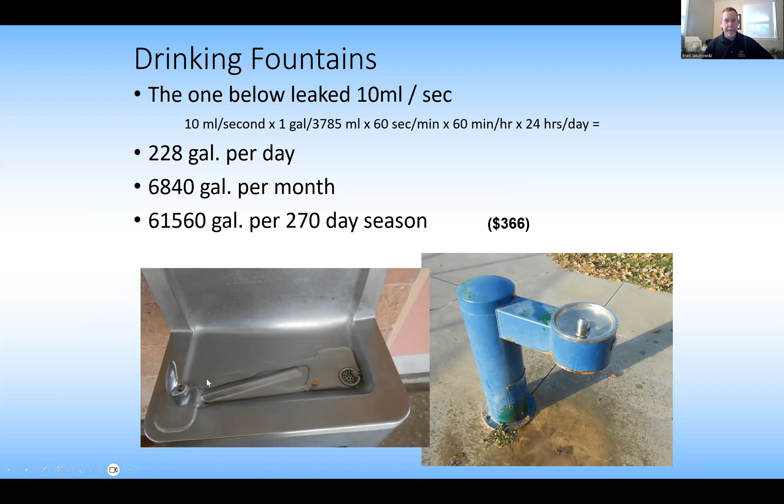Again, over here in the bathrooms, sinks — this one here, you either bumped it with your leg, or it was an automatic one. This one would not shut off. So it was a matter of seeing how much water runs out of one of these without shutting off.

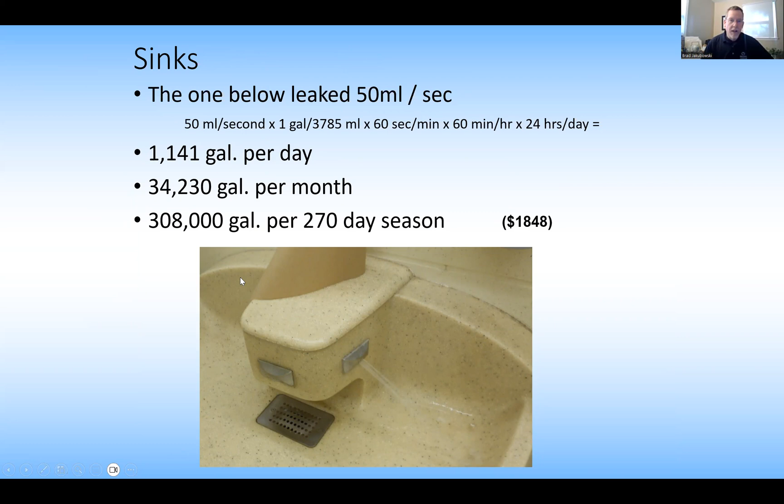With this one, it was about 1,100 gallons per day, or 34,000 gallons a month, or 300,000 gallons for a 270-day growing season. So all of a sudden this one is a pretty significant run of water, just by having this particular part of one of the sinks not shutting off. All of these different kinds of things can make a difference, and this one was fairly significant.

Urinals and toilets — of course I had to get in there and try. If this toilet wasn't shutting off, I wanted to find out how much water we'd lose with one of these. Estimated leaks on urinals and toilets were about 14,000 to 20,000 gallons per month, or with that 270-day season where they're open, about 126,000 gallons per season. So a leaky toilet or leaky urinal can also make a difference when we're concerned about something like that.

Okay, all right, so moving on.

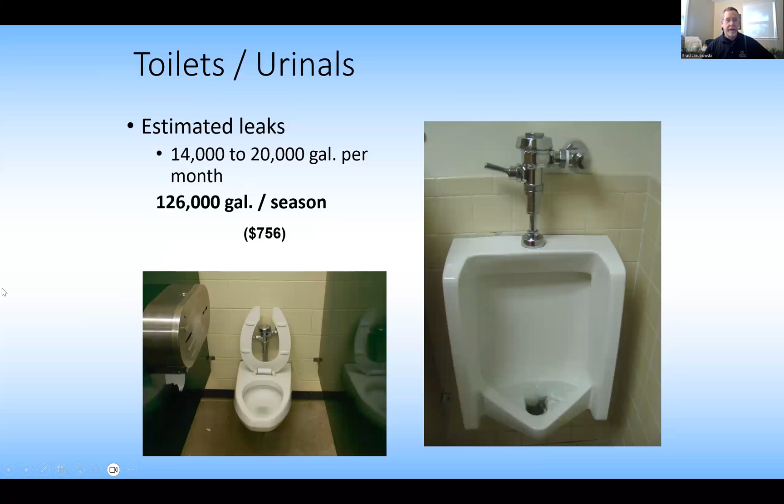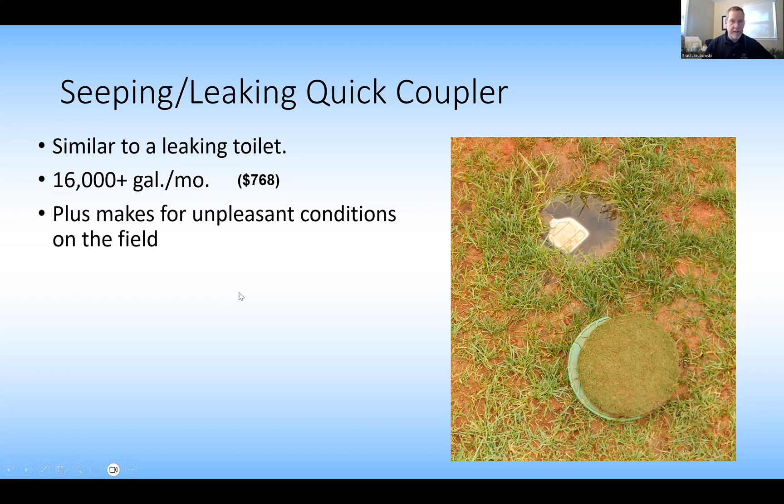Depending on how you do your lip work on baseball fields, do you use water, brooms, compressed air, rakes, or other methods? One field manager I worked with used water to finish off or clean those lips, and after about 60 minutes at 30 gallons per minute, they used about 1,800 gallons just cleaning lips. Finding an alternative to using water for that, or using a sod cutter later to clean the lips, lets you document the water savings.

So, recommendations from the industry: there are a whole bunch of different things, like what we looked at before, marking them on a glass as-built.

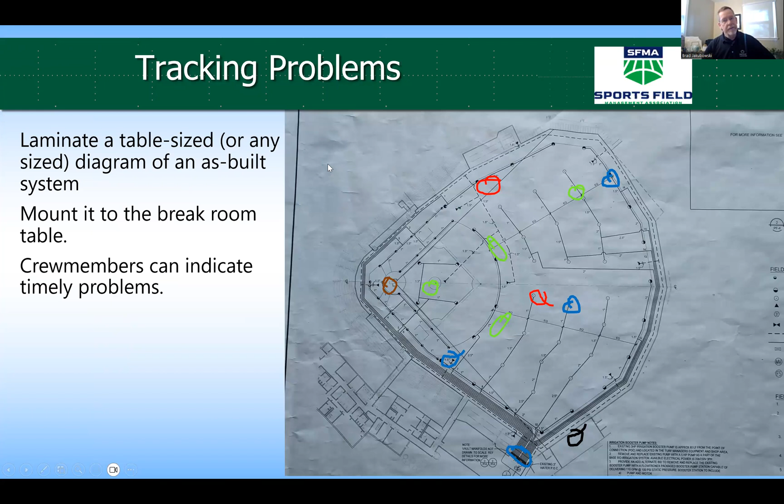If you have this laminated in the crew room on a table or break room table, whoever's working out there can spot something and mark it. For a single field it may not be as critical, but for a larger facility, like a 4-field complex, if you're mowing that day you can mark hot spots, weeds, wet spots, leaks down in the valve manifold area, or issues around the dish by home plate. This way whoever's working that day, you or your crew, can see what needs attention without someone having to remember to tell them. It's a good way of tracking problems, and it actually works out to be kind of fun.

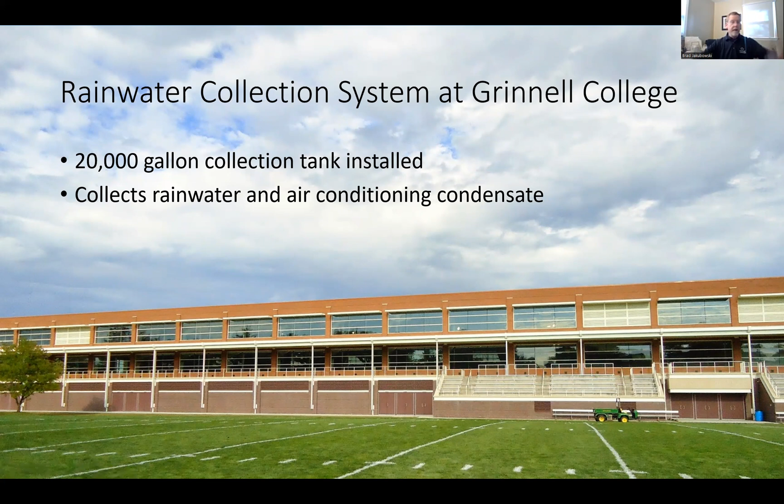Collecting rainwater is another option. You might find some way to do that, or just use 50-gallon drums to collect water for watering something. An 80-foot by 20-foot roof, about 1,600 square feet, will shed 1,000 gallons of water during a 1-inch rain event. That's another way to harvest water you could use, maybe for spray bottles during post-game work around home plate or the pitcher's mound, and then document that you're doing this.

We got this much rain this summer, and this is the size of the roof. So you can actually document this is how much water we collected and used for something else. You can document that and utilize that.

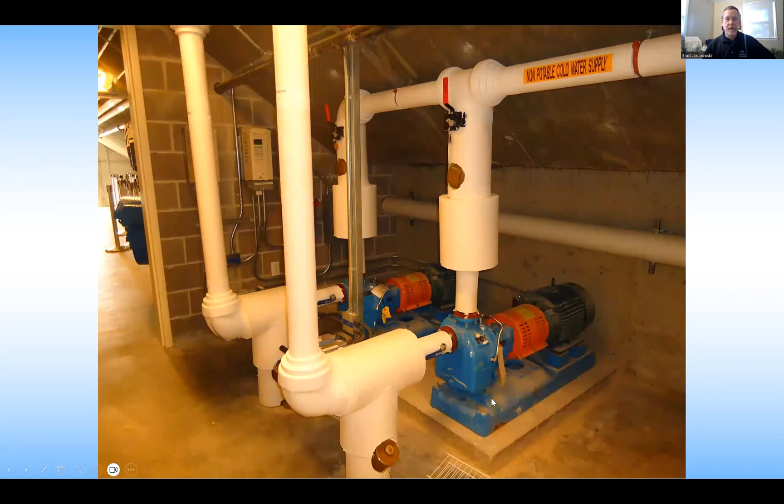This is a little bit more fancy, where theirs is automatically returned into this sump here, and they're able to use this. They've got a storage tank underneath where they can pump this water out. So that's a pretty significant one. But you could just use 50-gallon drums or whatever to collect some of that water in a short period of time and use it.

So again, other recommendations from the industry: conduct full-time head checking and repairs. If you don't do that very often, sometimes we go out there and kind of stick our heads up once we fire up the sprinklers, and we can see that. Or sometimes it's just a matter of taking a little extra time. We've got a lot of heads we need to raise up, they're just getting a little low, so it may be a matter of doing a few at a time to get those heads raised back up. Especially if they're close to the warning track and covered with track material, that can be a real challenge.

But don't let the equipment dictate watering. Use whatever you have to make good watering decisions. All of these things can make a huge difference out there. So, develop a water budget. Learn your ET rates for your particular area. If you used 0.75 inches that week from ET, then maybe you can dial back your sprinkler systems.

Find some way to reduce our turf footprint. For an athletic field, that isn't going to happen unless we do that around the clubhouse or buildings. But our fields, we can't really do much with that. We could try root zone amendments—there were some products at the trade show I'd like to try out that may help with water management. That might be something to consider.